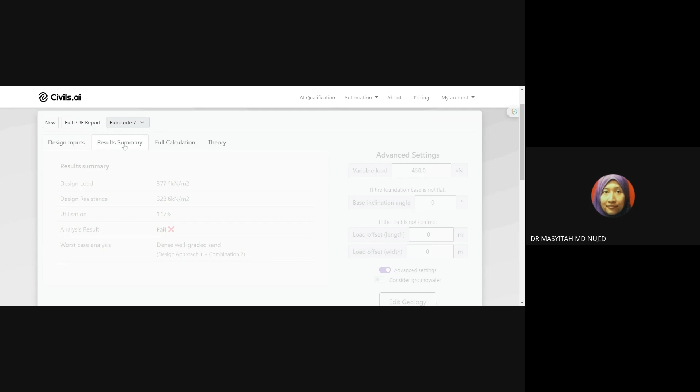Design load di sini kalau you tengok pada Eurocode punya teori, whatever things that apply on our soil profile ataupun soil surface, we have to ensure that the soil tak fail dalam failure sama ada general, punching ataupun local shear failure. Itu dia punya theoretical that stand to the safety. Kemudian dalam Eurocode 7 dia menggunakan pakai ultimate limit states. So the ultimate limit state ni for the Eurocode dia ada beberapa series lah. Contohnya structural limit state, geotechnical limit state and other things lah. Yang theoretical saya akan explain later. Okay. Itu adalah design load.

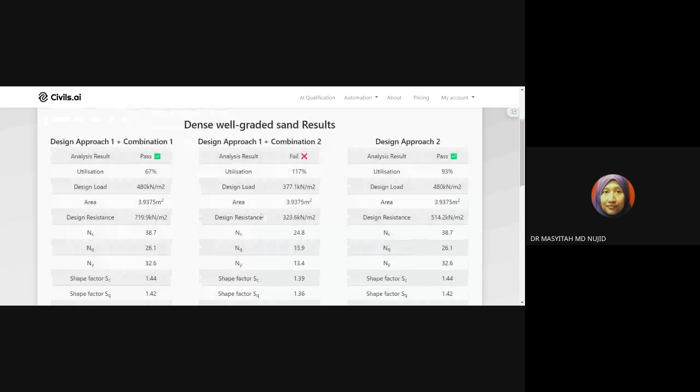Okay, in this case, dense well-graded sand results ni actually based on one Eurocode example calculation. Saya ambil satu contoh yang menggunakan pakai Eurocode design. Kemudian saya analyse menggunakan Civils.Ai. So I want to see lah dia punya differences because Civils.Ai adopted theoretical from Eurocode 7. So dia punya result mesti lebih kurang sama. Yang tak sama tu dekat design approach sajalah. Macam ni design approach 1, combination 1, design approach 1, combination 2. So dia ada beza sebab dalam combination 1 untuk partial factor of safety there will be difference.

So in Eurocode everything that you want to design dia akan ada partial factor of safety. Contohnya partial factor of safety untuk action daripada loading tadi, kemudian partial factor untuk geotechnical parameters ataupun material parameters, and also partial factor of safety for resistance. So setiap benda ni kita kena bahagikan dengan partial factor of safety.

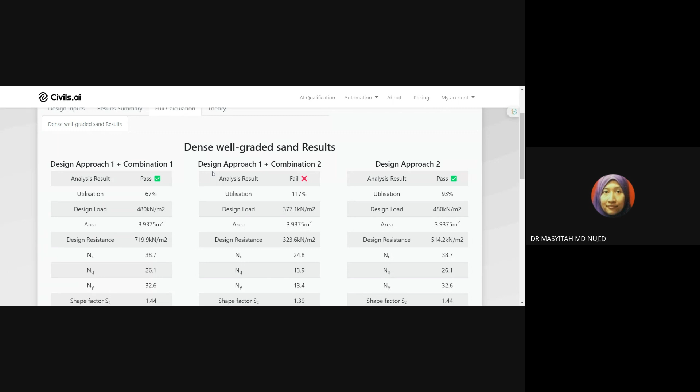If you remember, kalau you bandingkan dengan theoretical, in order to get the factor of safety, kita akan analyse as a global factor of safety, yang mana kita calculate dulu Q ultimate bearing capacity, kemudian kita bahagi dengan Q allowable, they can have factor of safety. So that's all overall. Lepas kita dah buat semua calculation, baru kita check dia punya FOS. That is a theoretical ataupun yang biasa traditional conventional analysis buat. Tapi untuk Eurocode dia bukan macam tu. So every single thing has a partial factor of safety. There must be a reason why European countries agreed to this design lah. So yang tu saya tak sentuh lah.

Okay, yang ni saya kata utilization combination 1 less than 100, design approach 2 pun less than 100, so it is fine. Kemudian dalam Eurocode dia banyak menggunakan pakai teori Meyerhof dan Vesic untuk calculate ultimate bearing capacity. For this assignment, as we discussed last Monday, kita agreed untuk buat on the shallow foundation sahaja sebab this is the beginning of the Civils.Ai usage among the students and also for the first time user yang menggunakan pakai code baru. So kita tak pergi in depth walaupun Civils.Ai ni can offer for deep foundation, retaining wall.

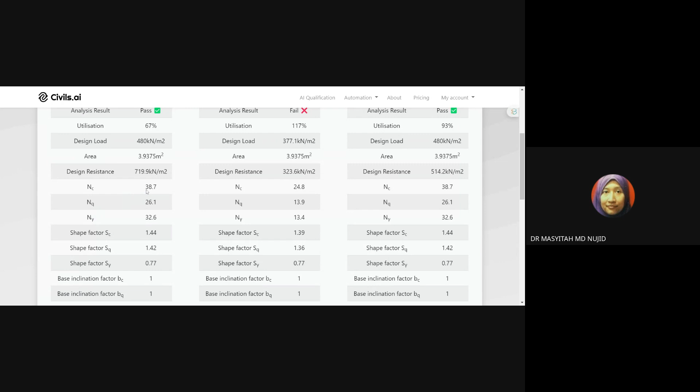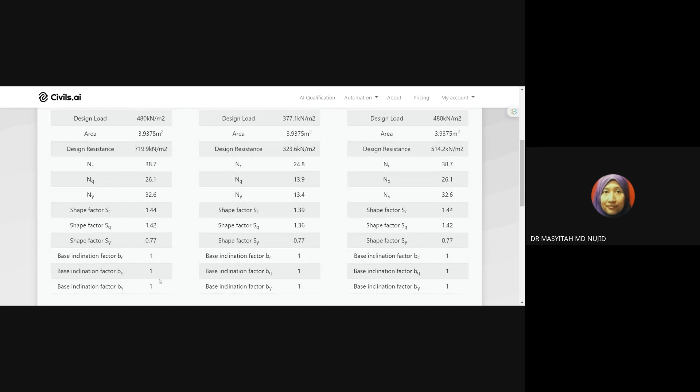And if you look at this one, after we have the design resistance, they can give you the bearing capacity factor NC, NQ and N gamma. So dia ada some modification NC, NQ and N gamma ni mengikut formula yang dah dimodify untuk digunakan dalam Eurocode 7. Shape factor, SC, SQ, S gamma dan juga inclination factor. So in this case, inclination factor, kalau kita look back to our design input in this problem, saya consider as a well-graded sand. So macam mana kita nak make sure that our input tu correct tak correct.

Mostly first sebelum you nak buat analysis, you have to identify dulu lah your problem ada tak variable load, kemudian loading you vertical ke ataupun ada some inclination angle, and then load offset ni is talking about eccentricity. Kalau kata load you tak bertindak pada center of the footing, so dia akan ada eccentric length. So eccentric length tu berapa, offset dia tu berapa. So you have to define. If that loading pun not in 90 degree, inclination pun they can have the eccentricity value lah. So you can set that one.

So beginning kita boleh start dengan edit geology lah. In my problem, saya ada single layer since our assignment can have a few layers. So please guide the students according to the SI report lah, borehole report. So borehole report ni they can add various input lah. I mean that kalau kata student can have to 30 meter, so you can see a few various depth layers and different soil properties, and then you can save. When you save here, the save changes maknanya all the default bila you masuk Civils.AI yang awal-awal tu dia akan hilang. So dia akan masuk kita punya value.

So this case sebabkan saya ada variable load, saya akan aktifkan advanced setting. Kalau you ada groundwater table, you can also adjust ataupun aktifkan groundwater. So in this problem, sebab dia tak ada back button, saya tak main back button dekat arrow ni, so I just turn off advanced, then I can go back to the initial window lah.

In this first window, you can see the structure dimensions of your foundations. Here we have rectangle, we have circle. So you can advise students to use these two footing shapes, either rectangle or circle.

I tried to have a strip footing, but it's a bit different because a strip footing doesn't have dimensions B times L. Another problem is the applied load. The applied load in a strip footing is carried per meter, but the rectangle one works with loading in kilonewtons.

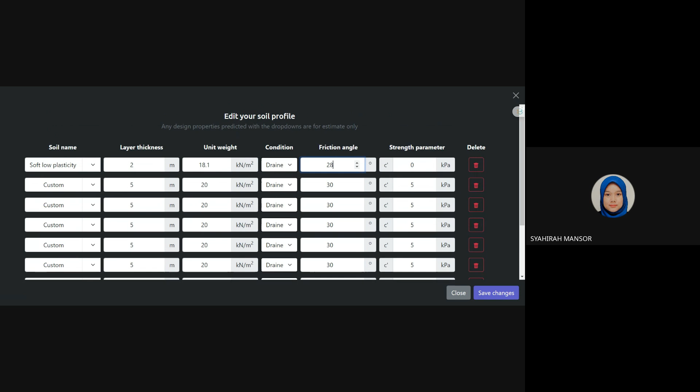Tapi bila kita analyse for theoretical, the soil ultimate bearing capacity, sebenarnya dia hanya affected for the first layer saja. Ingat tak kalau kita nak analyse bearing capacity of the soil? Apa-apa pun thickness sampai ke 20 meter, the bearing pressure only close to the first layer saja. Maknanya dia punya contact pressure, the bearing pressure, the high concentration ni hanya berlaku pada the first layer of the soil yang just beneath the footing tu. Yang the rest tu depending to the stiffness dan juga strength soil.

So that's why kalau first layer ni weak and then second layer is strong, you might see that dia punya contact pressure ni most concentrated at the first layer. Second layer tu dia dah lower because it's the dense soil, for example gravel. Tapi kalau the first, second, third layer tu still clay, silty clay, you might see

that the changes. Dalam Civils.Ai ni dia tak plot the contact pressure, the bearing capacity. Dia hanya keluar output result saja, fail tak fail. So kalau in details, they can go to other software. Tapi as I said, whatever soil layer you masuk pun, dia hanya main dekat first layer saja. Tapi kita nak minta student apply daripada data SI report, lepas tu analyse. So we have to make students do it in a few layers.

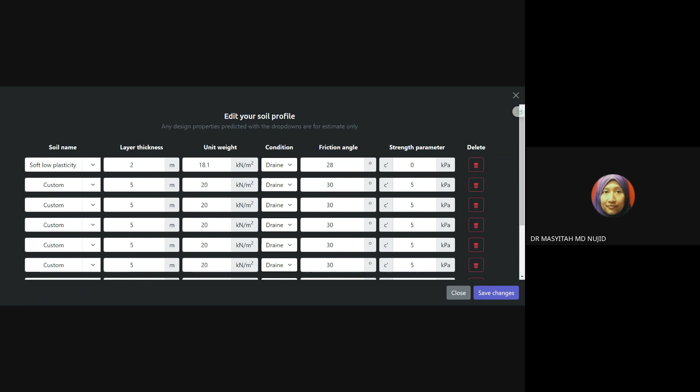Dr. Masyitah, kalau kita unclick advanced setting tadi, maksudnya footing length and width tu kita reka, macam mana? Okay, contohnya, dalam this case problem ni bebas, cuma the problem we rely on the soil profile untuk analysis. If the students assume that the load is at a certain angle with an offset, so students can create it or rely on the SI report. SI report selalunya come with the layout of the building.

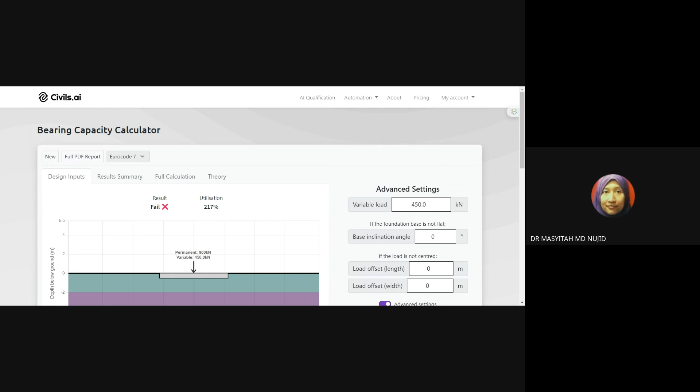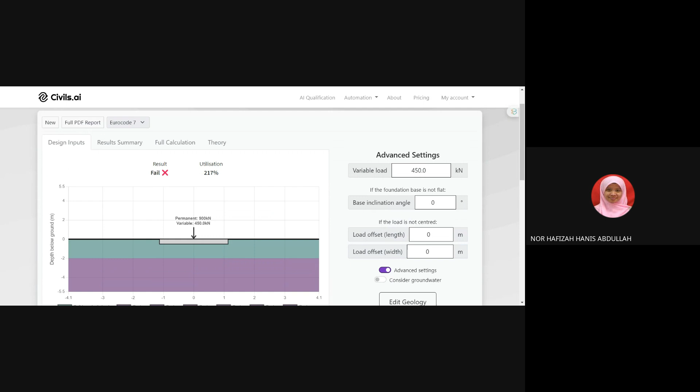Kalau during the time student tu hanya ada borehole report saja, dia tak ada full set SI report, so dia tak tahu project description, details geology profile, so dia tak boleh buat yang tu. Tak apa, kita boleh minta students just create the soil profile according to the borehole and the problem identification based on your assumptions. So students kena create their own problem description.

Sebab dalam perbincangan kita hari Isnin tu, they were not specific on the problem. For this moment, tak ada lagi soalan rasmi untuk this assignment. What we have is student diminta cari borehole report ataupun SI that can be used for the assignment. Sama ada soalan tu standardized to all ataupun berbeza mengikut individual students, that's depending on the RP dan penyedia assignment. Cuma kita decide assignment adalah individual.

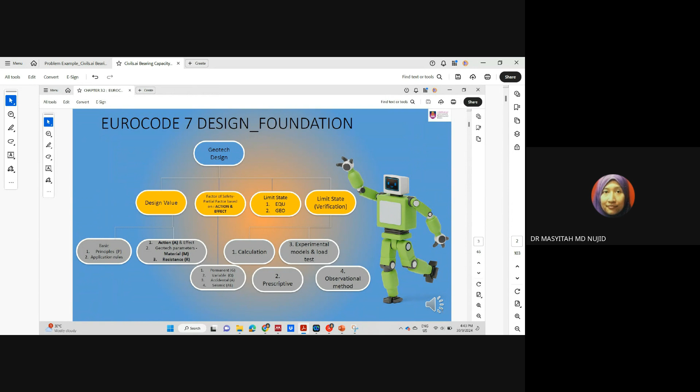Okay, dalam flow chart ni, the simple flow chart yang boleh kita keluarkan, kita kena tahu design value. So dalam design value untuk Eurocode ni, untuk kategori basic ni dia ada principle, kemudian dia ada application rules. So that is the guideline yang dia set untuk Eurocode.

So in part of the design value, yang ni yang saya katakan action dan juga effect. So material dan juga resistance. Ada satu lagi tu dia panggil structural geometry macam tu lah. And then factor of safety.

So here kita tak panggil global factor of safety, tapi kita panggil dia partial factor of safety on action dan juga effect. Action ni can come from the loading. Loading tu sama ada variable, ataupun permanent, ataupun unfavorable variable.

Kemudian sekejap. Hello.

Okay, back to here. Action ni tadi okay, dia ada daripada loading impose load ataupun loading daripada footing weight. So kalau kata problem tu dia bagi tahu ada impose loading berapa, kemudian dia bagi tahu concrete weight, dia bagi dimension of the footing, so kita kena count for the weight of the structure lah. So they park under actions.

So bila ada action mesti ada effect. So that is why kita kena analyse for the resistance. So below here you can see that for the actions then effect, kita can call the action permanent action, variable action, accidental action dan juga seismic action. So action ni ada 4 jenis lah. Selalu yang pakai ni G dengan Q sajalah.

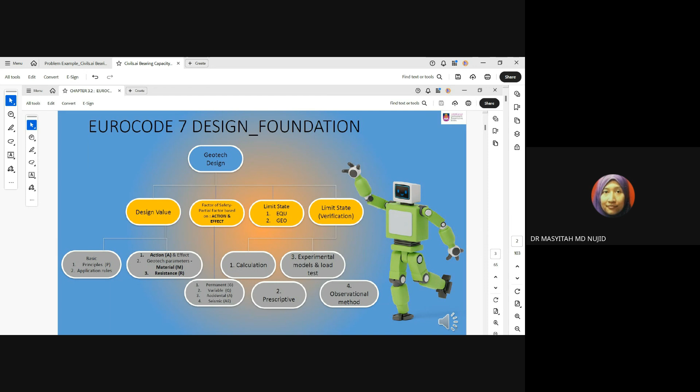So tengoklah design approach berapa yang dia katakan safe. So in that Civils.Ai ni dia mudah, dia tunjuk result, lepas tu kita check detail calculation. Tapi kita nak kena tahulah behind it berapa. Okay, verification juga dia boleh buat secara calculation, experimental, ataupun prescriptive or from the observational method.

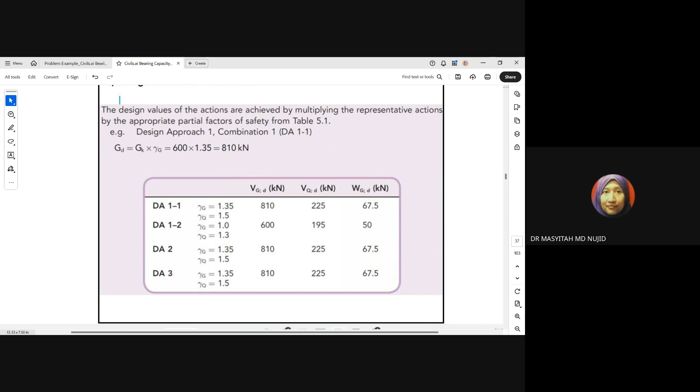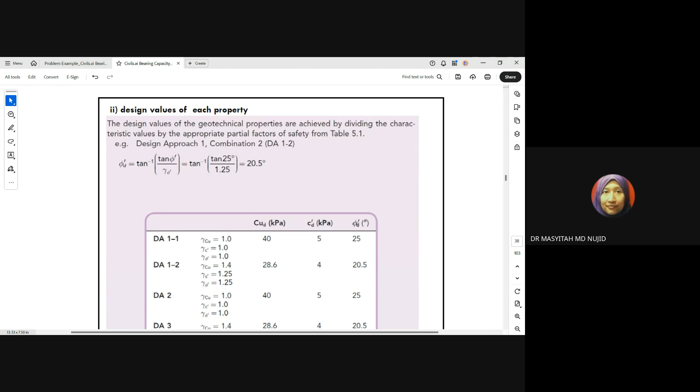Okay, untuk geotechnical parameters, untuk dapatkan the final design value for that strength parameters ataupun C and phi, dia kena bahagi dengan partial factor safety. So all these values, CU ke CD ke phi, they divided with the partial factor safety lah, depending to the approach 1, combination 1, approach 1, combination 2, approach 2 dan juga approach 3. So basically dia refer pada soalan.

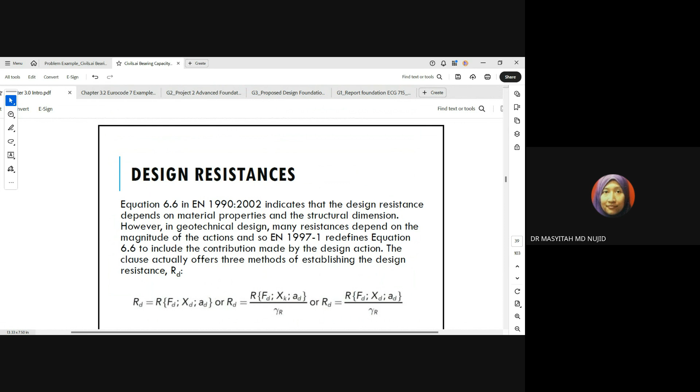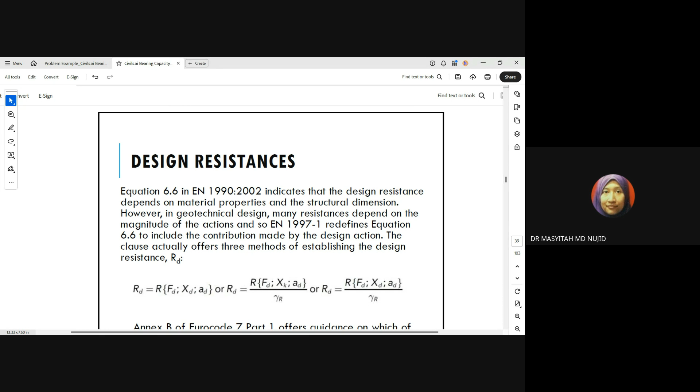Okay, ini adalah design resistance. Kalau kita design for pile, so most of the time kita kena pakai this formula lah, sebab kita nak kena buat perbandingan pile load untuk bearing berapa, pile load untuk shaft berapa. So for shallow foundations, design resistance ni dia quite easy. Dia just bahagi terus je dengan partial factor safety yang dapat daripada table 5.1.

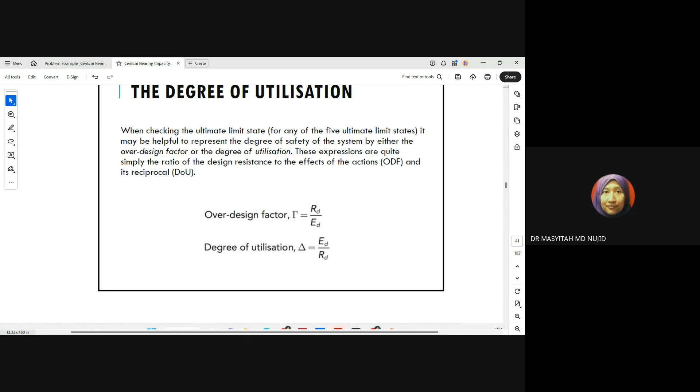Okay, this is finally how to say whether the design is safe or unsafe. You look at the degree of utilization. It should be less than 100% lah. ED is the design effect of action. RD is the design resistance. So dalam ultimate bearing capacity, kalau kata kita design contoh, okay, this is the problem.

So on top of the soil, that is called the design effect, ED. So the soil must retain the loads from the upper layer, so safe from the general shear failure ataupun local and punching. So that is the R. So the effect loads coming from the top must be lesser than what can be carried by the bottom lah. So design effect ED tu mesti kecil daripada design resistance lah.

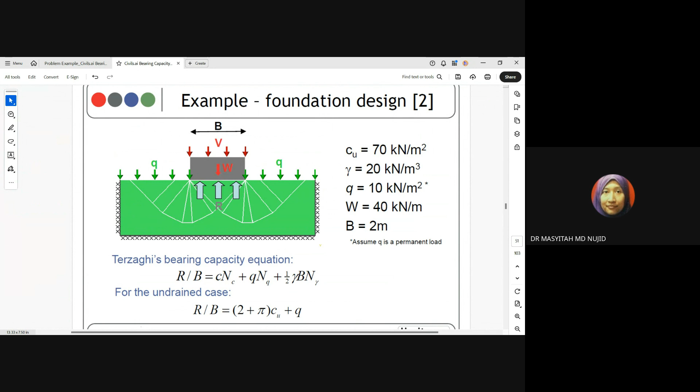For here, untuk Eurocode 7, for undrained soil, this is the formula. Maknanya dia guna pakai directly for that particular Terzaghi punya equations lah. So the coefficients ni kalau ikutkan dia depending to the foundation punya type. So kalau kata strip footing, it's applicable lah the formula. Tapi kalau kita ada rectangular, circular, the formula is not applicable because we have to see the coefficients, berapa nilai depan dia, Q dan juga for term number 3 lah.

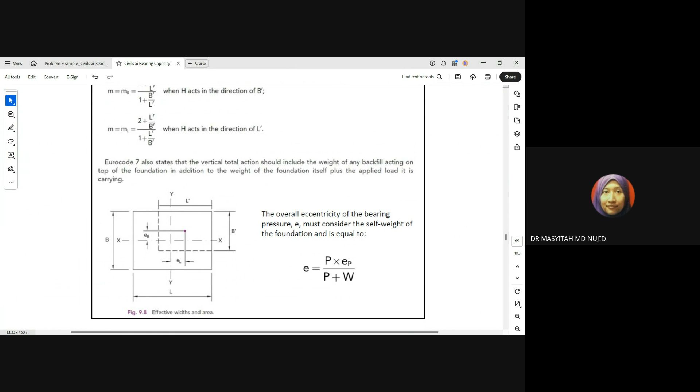Advanced setting ni saya just connect the theory berkaitan dengan eccentricity. So what is the eccentricity? So kalau untuk Eurocode ni memang dia banyak ambil Meyerhof dan juga Vesic lah. Okay, for the problem here, contoh lah saya straightforward yang mana saya dah check dengan calculations. Ini semua default example daripada Civils.Ai. Ini pun Civils.Ai punya theoretical background.

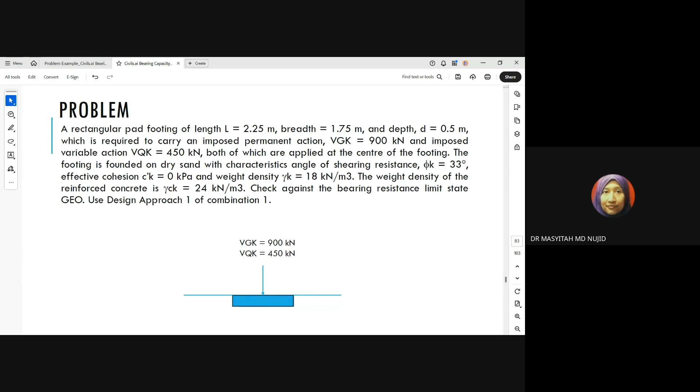Dia menggunakan Barnes textbook. Okay, this problem example yang saya tunjuk tadi, kita ada length 2.25, lebar 1.75, kemudian embedment depth 0.5, permanent load 900, variable load is 450, kemudian loading acting at the center, geotechnical parameters 33, 18, and then concrete weight is 24. So here it says check against bearing resistance limit, iaitu design resistance, GEO limit state, menggunakan design approach 1, combination 1. So dalam case ni saya tak buat calculation for combination 2, dia just for 1 only.

So now it starts dengan theoretical analysis by Eurocode 7. Kalau kata kita faham dia punya step, surely no problem lah untuk you pakai Eurocode. Tapi problem dia tu macam static lah, dia tak dynamic. Kita tak nak ubah-ubah, sebab for the beginning, first understanding lah. So untuk calculation pertama, actions dan juga effect. So it comes from the foundation weight, for example here.

And then from the action loads, permanent dan juga variable. So W is from foundation weight tadi, 47.25, tambah dengan permanent load 900, darab dengan partial factor of safety for actions, plus dengan variable actions times dengan partial factor of safety. So you can see that every calculation dia akan ada partial factor of safety masing-masing. For this case, kita dah bagi tahu design approach 1, combination 1. So before you do the calculations, you need to find what's the partial factor of safety lah untuk setiap action, material dan juga resistance. So you list out semua tu dulu baru you buat dalam calculations.

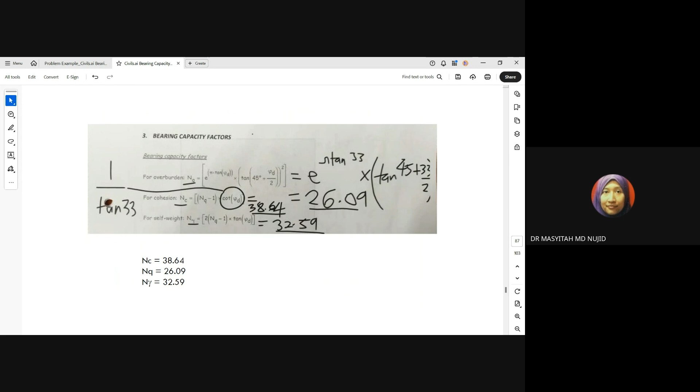Barulah last kali kita check dia punya bearing resistance. So overburden pressure at base dapat 9 kPa. So now kita nak dapatkan design resistance. So the total design resistance is 719.67. Kemudian nak check dia punya utilizations. So from here what we can see is that design resistance bahagikan dengan partial factor of safety for resistance is 1.0. So you can have back 719.6 lah. Kemudian utilization antara design effect dan juga design bearing resistance. So design bearing resistance ni yang telah dipartialkan. So we have that the value utilization is less than 100, so that it is safe.

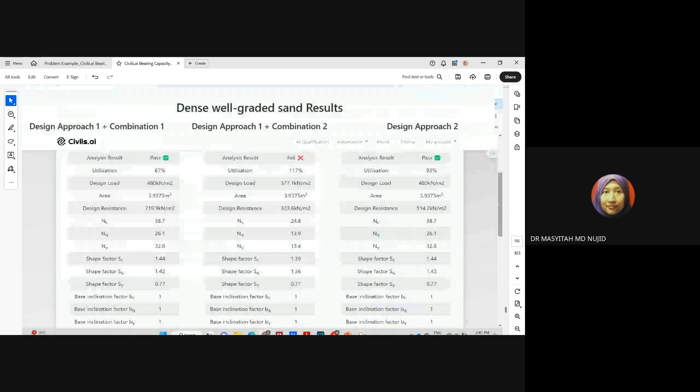So then ini yang Civils.Ai dah explain lah, saya go just straightforward lah. Okay semua. Ini dia punya result yang dia dah keluarkan. So we just keep it and save. So let's say we verify. Ini yang menggunakan analytical. So bila analytical, contohnya rectangular. Ini formula dia. So rectangular, so SC berapa, SQ berapa, S gamma. So bila saya buat verification using the analytical, my assumption is that since this problem hanya bagi formula for shape footing lah, SC, SQ, S gamma for rectangular, so I use this one to calculate. But NC, NQ and N gamma saya ambil daripada table for phi 33. So I check from the table. So NC, NQ and N gamma like this. Contohlah 38.6, 26.1, 29.3. So this is the shape factor yang saya calculate lah.

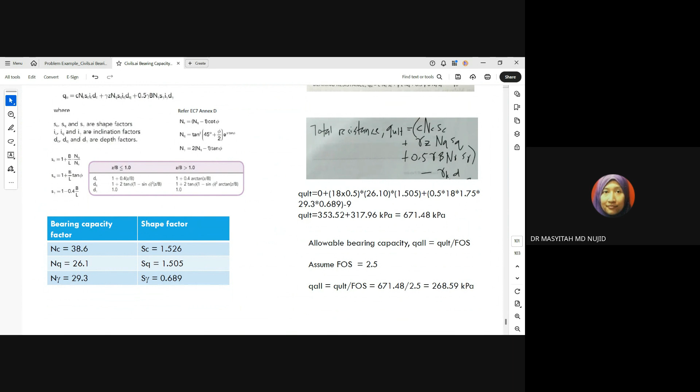So that is what we say here. Ada some mixings lah antara formula to find what's the specific one lah. Contohnya kalau untuk shape factor, kita use this one for the analytical calculations for comparison lah. Kemudian untuk conventional, saya ambil daripada here dan juga NC from Terzaghi. So what happened bila kita calculate, dengan assumption factor of safety is 2.5, I found that the allowable bearing capacity is 268.59 lah. So this one already in the stress value lah, maknanya kilonewton per meter square dah considered for the problem. If I use factor of safety 3, dia akan bagi different answer.

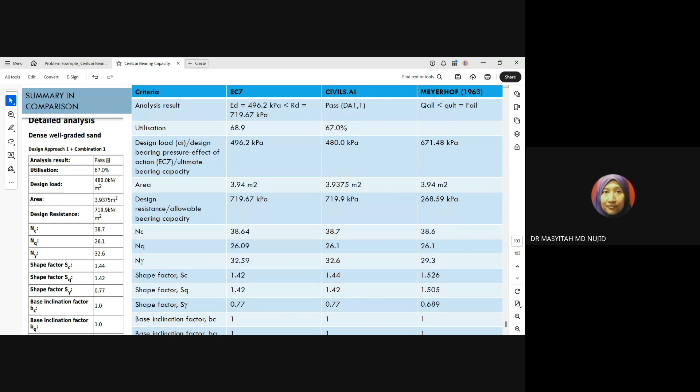So in the summary, saya list on the table, what can we say is that kalau Eurocode 7, sebabkan dia tak ada comparing for combination 2, saya menggunakan combination 1, approach 1. So saya boleh kata dia pass lah, dia selamat, sebab ED saya lebih kecil daripada RD. And then bila saya tengok from the Civils.Ai, it is pass for design approach 1, combination 1. So dia tally lah. But using the Meyerhof formula, it's found that fail. So maybe something during the bearing capacity factor, ini need to be checked again lah. For the utilizations, Meyerhof dia tak check for utilization, dia just tengok gross factor of safety kita.